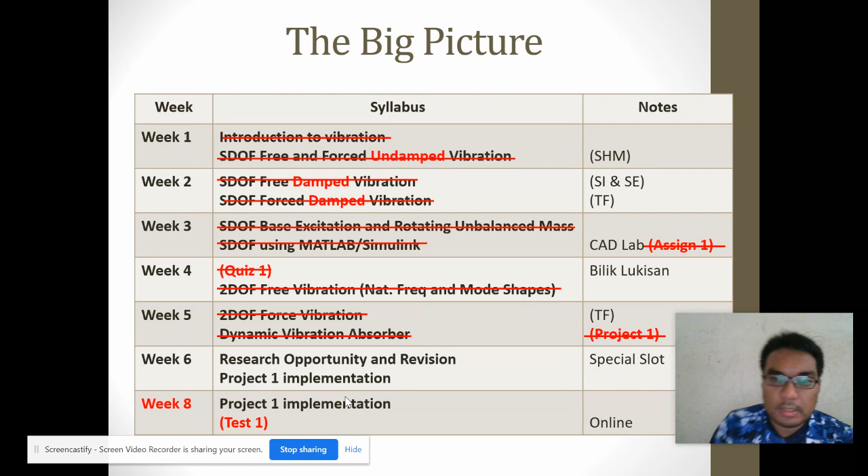For today we will review a little on what we learned before, and some of the main topics of my research. Topic number 1 is on active vibration control and active force control, on how you can control vibration instead of using passive methods like the dynamic vibration absorber. This is a more advanced method where we use real-time control of vibrations.

That also works in various operating conditions. The second topic is on piezoelectric material, one of the smart materials that can be used as sensor and actuator for any vibration system. The third is on noise and vibration characterization of the HVAC system, the air conditioner system.

Topic number 4 is on dam vibration analysis, in terms of flow-induced vibration from the fluid, when there is turbulence and how it can affect the vibration of the structure.

Topic number 5 is more towards what you learned before on the dynamic vibration absorber, one method of structural dynamic modification, SDM. Basically we have 4 methods where we can modify the mass, stiffness and damping, and also apply the DVA directly.

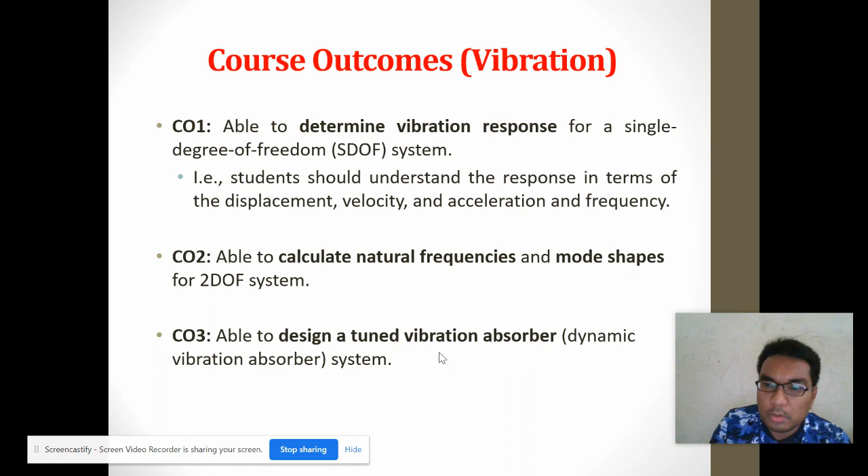Just to refresh also on the course evaluation: the final exam as of now remains 60%. Coursework is 40%, with 20% for my parts and 20% from Dr. Ui on the noise part. There's some modification on the percentage calculation for my parts. The test one that will be conducted later online is 6%, and the quiz one you have done is 6%.

This part, numbers 1 and 2, is more on the individual parts. For the group part there is assignment 1, MATLAB and Simulink, worth 4%, and also the project for the DVA is also 4%. So it's a total of 12% from the individual part, and another 8% from the group part.

So this is the overall revision. The first topic we learned is on single degree of freedom free undamped vibration, where there is only mass, stiffness, and the response, or the degree of freedom. You have to have these three elements for free undamped vibration.

The damping is equal to 0, no damping elements, so the vibration remains as is. It is not reduced in time because there is no damping, and there is no excitation force, so there is no transient period here.

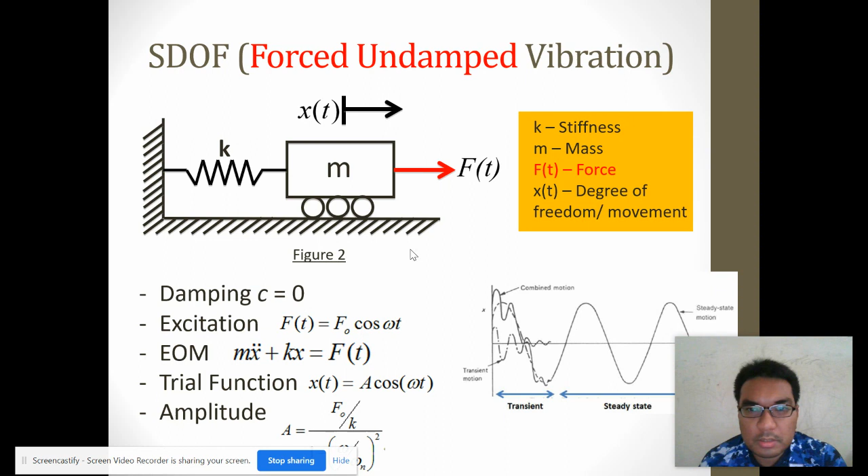So the second topic is on forced undamped vibration. There's just an additional force here, highlighted in red. For this case, c equals 0, so there's no damping.

There's no damping, but there's an excitation force, the external force f(t) equal to f naught cosine(omega t). The f naught is the amplitude, the initial amplitude of the force. This is the equation of motion, m x double dot plus k x equal to f(t), where there's an excitation force. The trial function must follow the excitation, so when the excitation force is given by cosine, the trial function must also follow cosine, so that we can cancel out later.

If it's given by sine, it must follow by sine. So this is the amplitude of the vibration that we can calculate, after we derive the equation and get the amplitude here.

This is the effect of the force, where there's a transient period, the transient motion. Then when it's combined with the steady state motion, it becomes a combined motion like this, with just a short period of transient before it becomes steady state. This is a very important part of any system that has an excitation force.

During this period, when an excitation is induced at the natural frequency of the system, the system becomes resonant. So make sure you design your system to avoid the natural frequency of the system itself, unless you want it to become resonant and your system to be disrupted.

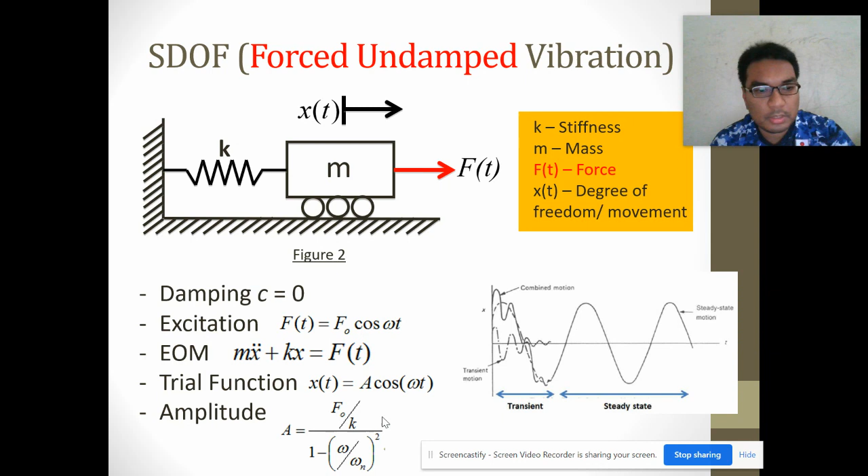From this, you can plot a graph, if you still remember there are three conditions of the excitation, shown in terms of amplitude and frequency ratio. This is the resonant part, where omega is divided by omega n.

Below, there are basically three conditions: omega near 0, omega equal to omega n, and omega being infinite, too high. You can refer to these equations, the formula, where when omega is too small, the denominator becomes 1 and there's a steady static deflection, this is f naught over k.

Then when the excitation increases and becomes equal to omega n, the denominator becomes 0, so when you divide, it becomes infinite. This is the area of resonance, there's no peak plotted here because it's a resonant phenomenon.

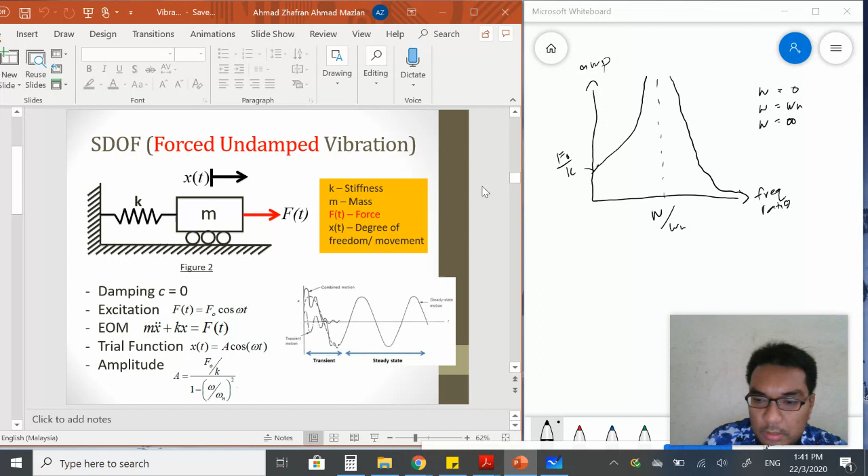So this one is for free damped vibration, when a damping element is introduced to the system. There's a free damped vibration, no force, but there's damping here. So for this, the damping is not equal to 0, it has a value, and the excitation equals 0.

There is no external excitation force. The equation of motion will be m x double dot plus c x dot plus k x equal to 0. So you have the trial function x(t) equal to A e to the power lambda t, where you want to determine lambda so that you can determine three different damping ratios.

So there's an additional equation formula that we introduce, the damping ratio, which is the percentage of damping in each system relative to the natural frequency. It's equal to c, the damping coefficient, divided by 2 times m times omega n, where omega n is the natural frequency.

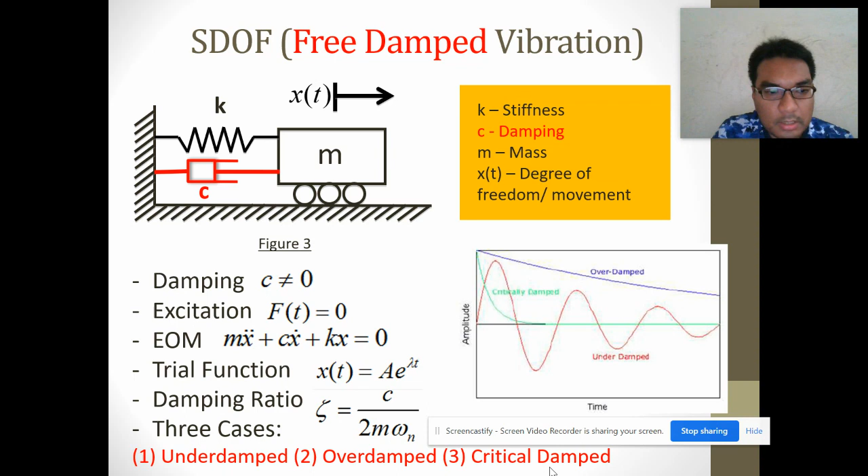So for this case, you will determine three conditions: underdamped, overdamped, and critically damped. For this one, you have a system like this, shown in terms of time and amplitude.

So you have a system which is underdamped, where this one is damping ratio less than 1. Damping ratio below 1 is underdamped. For the overdamped, the second system, you have a response like this, where the damping ratio is over 1. It's too large, this is too small, and there will be the case of critically damped.

We as engineers always want to design a system like a suspension system to have a damping ratio equal to 1. That's the most efficient design of the damping system.

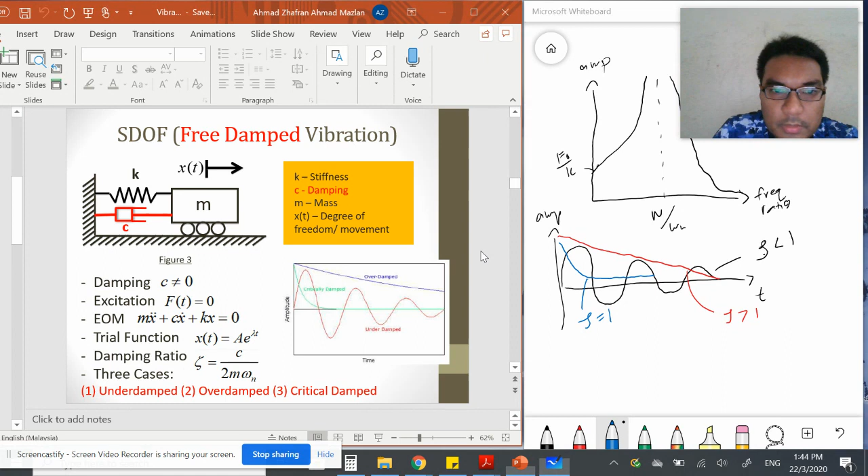Another topic here is the forced damped vibration. For this one, there's a total of 1, 2, 3, 4, 5 elements here: stiffness, damping, excitation force, the mass, and also the response. For this case, the damping is not equal to 0; it's a damping element. The excitation force is F0 cos omega t.

The equation of motion is the complete one, m x double dot plus c x dot plus k x equal to F(t). The trial function x(t) equals A cos(omega t minus phase theta). And this is the amplitude that you get, and also the phase angle formula.

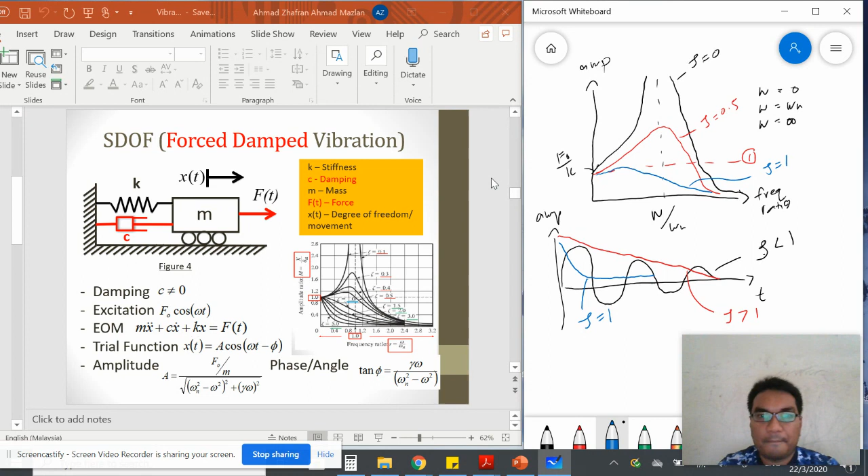The next part will be two examples of applications of the single degree of freedom. The first application is the rotating unbalanced mass, where you have the excitation force in terms of the unbalanced mass here.

The system has stiffness and damping, and the total mass big M, which includes the mass of the system and also the small mass m of the rotating mass. The eccentricity e is the radius from the center to the unbalanced mass. The angular speed omega is the rotating speed if you have a machine or motor in your system rotating, for example, at 200 hertz. And theta is equal to omega t.

For this case the equation of motion is almost equal to the damped forced vibration: big M x double dot plus c x dot plus k x equal to small m, the rotating unbalanced mass, times e omega squared sin omega t. Basically this is F equal to ma, where the acceleration is e multiplied by omega squared. The trial function is x(t) equal to A sin(omega t minus phi), and this should be your final equation.

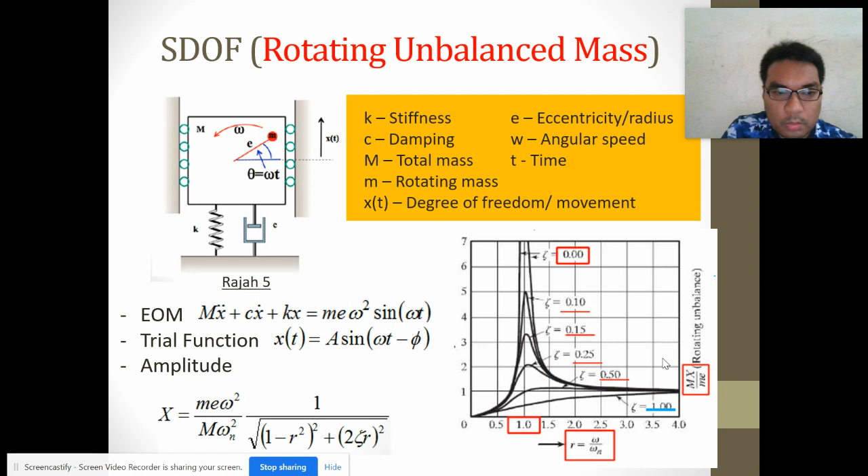This plot is quite different compared to the general one, where we start from the static deflection value of 1. This one starts with a value of 0 because there's the excitation omega in the numerator. So when omega is equal to 0, the overall amplitude becomes 0. Of course, as omega approaches omega n, when the frequency ratio r equals 1, it goes to resonance, similar to this.

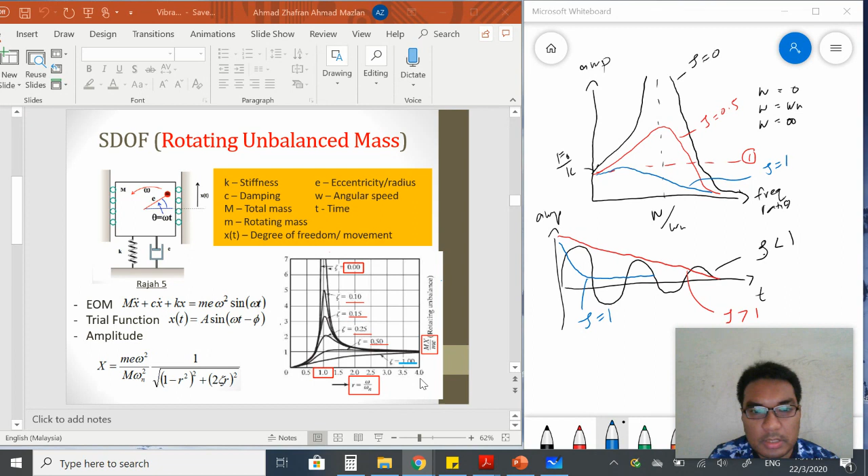That's why the rotating unbalanced mass must have damping. If there is no damping, it becomes worse, as we have shown you in the case of the helicopter and the washing machine. It can disrupt the structure, and by increasing the damping ratio, it becomes more stable in terms of vibration. The final value tends toward 1 as you increase the excitation frequency, so the amplitude almost becomes 1.

So our next system is on the base excitation. Okay, so the source is from the base. It's a moving base, it's not a fixed base like before. For example, this is a fixed base here, and this is also a fixed base here, but for this case it's a moving base.

Okay, so for this case we have stiffness, damping as usual, a mass, and also the response, and we have an additional y(t) here, or it can be x1 or x2. So the base has an excitation in terms of displacement and velocity. It's not in terms of force but in terms of velocity or displacement.

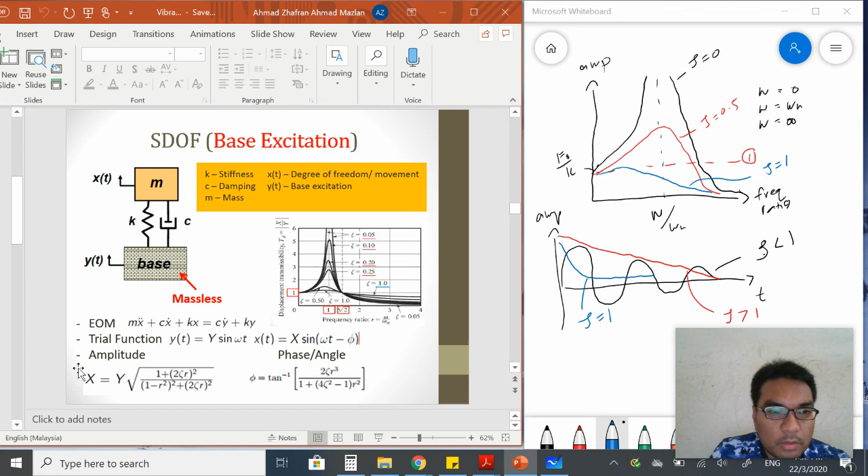So this is the equation of motion. After derivation you can get this one: m x double dot plus c x dot plus k x equals c y dot plus k y. So this will be the excitation to the system. For the trial function we also have one for the x response and one for the excitation y. So from this we can get the transmissibility.

Because here when you divide X over Y, output divided by input, you get this formula. And then when you plot from omega equal to 0, omega equal to 1, until omega at a large value, you get this plot, which is similar to the previous one for forced damped vibrations, starting from the static deflection here, going towards the resonance, and then going back down to 0 when the excitation frequency is high.

So this case is very special. For whatever value of damping ratio you have, when the frequency ratio omega divided by omega n equals square root of 2, all the curves cross at an amplitude of 1 here. So you still remember there are six rules of this graph, which may be asked later, and you have to know from this part what the six rules are.

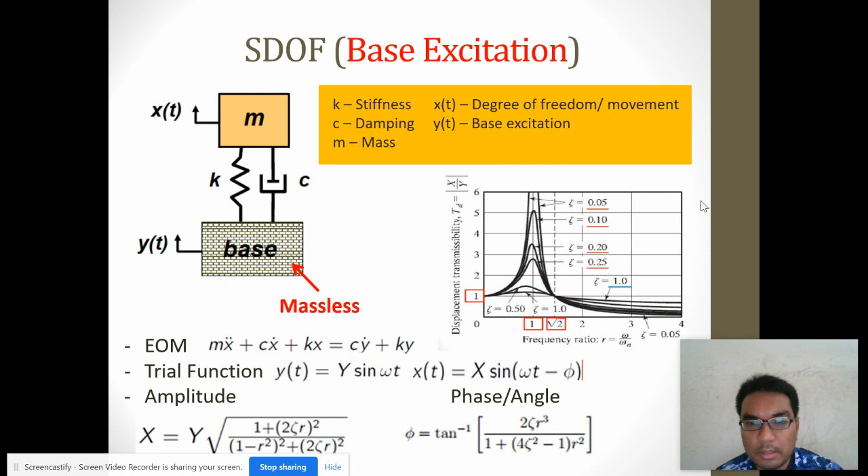Okay, comes to our next system: the 2 degree of freedom system, where there's an additional mass and spring system, and also the response. This one is under free undamped vibration; there's no damping element here. You have mass number 1, stiffness number 1, and response number 1, and also mass number 2, stiffness number 2, and response number 2.

So when it comes to a 2 degree of freedom system, you must have 2 equations of motion. When it comes to 3 degrees of freedom, you must have 3. If you get 2 degrees of freedom but just 1 equation of motion, that should be wrong; you must have 2. So the trial function is x(t) equal to X e to the i omega t. This is the trial function, the response of the system.

So you should follow these 4 steps. Step number 1, you must derive the equation of motion from the free body diagram, in matrix form, and later you replace the acceleration and displacement using this trial function. After replacing it, you get a roots equation, and if the values of mass and stiffness are given, you can find the natural frequencies omega 1 and omega 2.

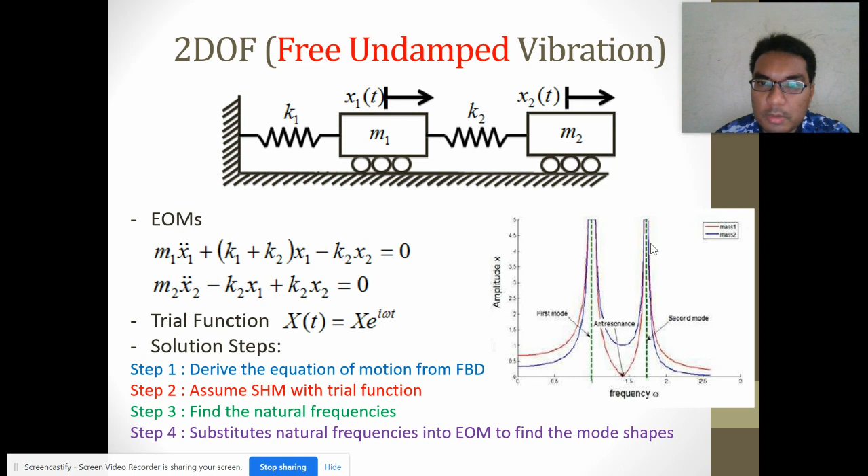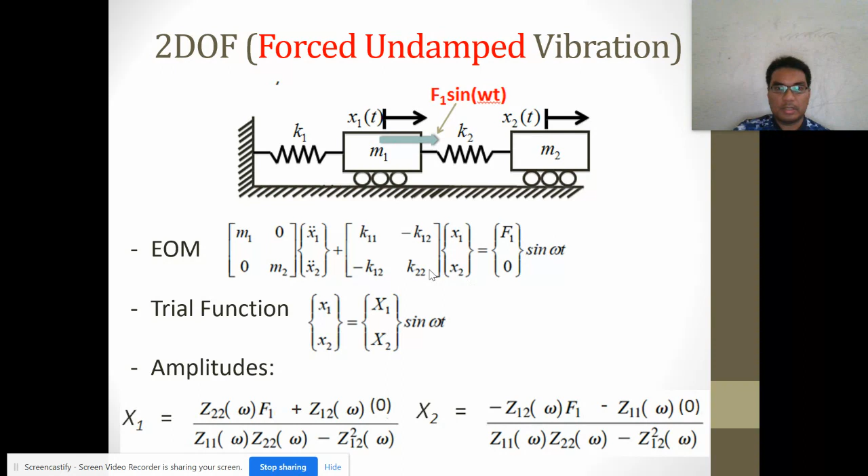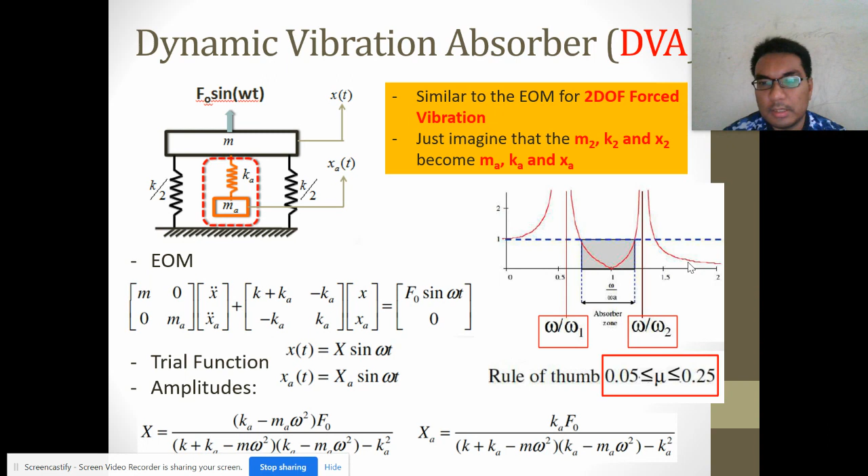So the rule of thumb to design your mass MA for the system: the mass ratio must be between 0.05 and 0.25. That's the thing you must be alert to for the system.

Next, I want to introduce the research opportunities for you. When you come to your final year and you want to decide what type of research to do, if you're interested in vibration, there are some listed topics I can offer to you. Maybe I can also show you some results from previous studies that might interest you. Just to show you some history of the students who took my final year projects, and also some of the postgraduates.

So your seniors have now done 2 topics. Jah did active vibration control for the piezo, and another person, Chiu, is doing intelligent control methods. He will also participate in Innovate Malaysia 2020, so we wish him good luck and all the best for the competition.

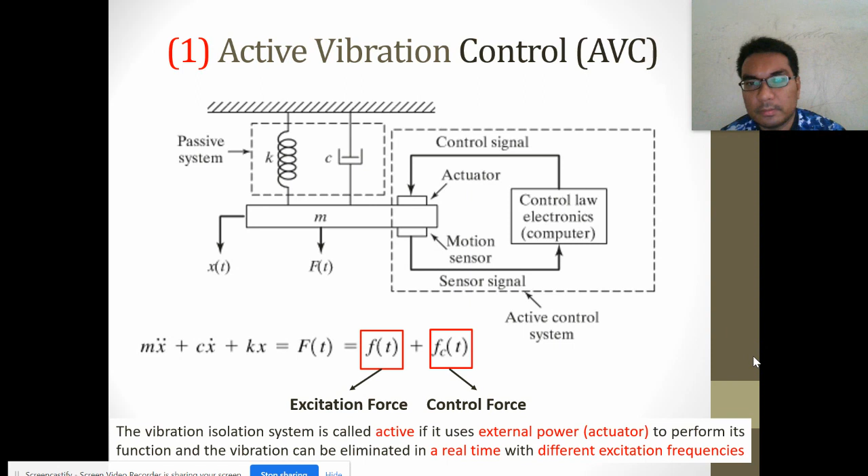The hand-arm model we can take from any literature on biodynamic hand-arm models; various studies have been done. We can pick any model we are interested in, and later insert the actuator in between, so we can develop a full model of active vibration control. For the system, you can see the difference between PD, the proportional and derivative controller, and the AFC, the active force controller, with a crude approximation tuning method, that we compare.

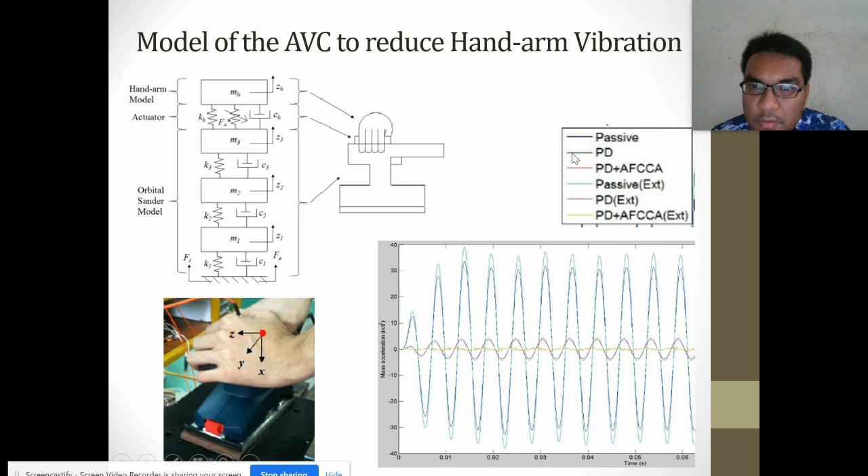You can see the blue one is the passive system. With the PD controller, it reduces here, and when you introduce active force control, it further reduces the vibration to almost zero. EXT refers to when we introduce another external disturbance, and how the system reacts. For the passive, when another disturbance is suddenly introduced after the tuning is complete, you can see the effect here. But for AFC, it still remains, the yellow and orange in a similar line. That's a very powerful controller for the system.

Okay, so you can also measure the force induced from the actuator. Okay, this is a piezoelectric actuator. It's a smart material. Okay, and then you can reduce the vibration, of course. Okay, and when we think about this,

the weakness of the piezoelectric is it must have a preload. Okay, you cannot just put it on the table and operate it. It cannot be done like that because it has a ceramic material there. It may break the molecules inside the actuator, and then the actuator may not function well. So we must have a preload like this in terms of a spring. Okay, so they will always account for the vibration.

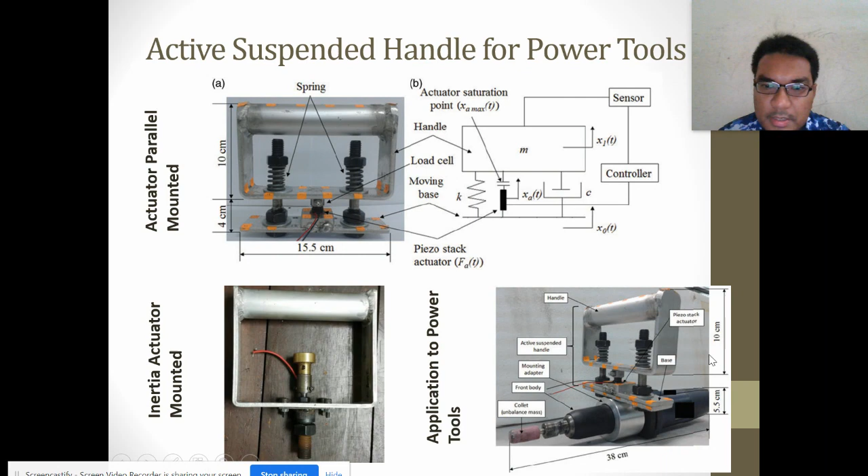Okay, because from this, when you want to apply it to a real application of a power tool like this die grinder, it's quite difficult because you have to disassemble everything and assemble it back exactly as you have here. But from this, you don't need to disassemble the system because it's already one set. You just need to modify the lower part to apply it to these power tools.

Okay, the second topic is on the piezoelectric sensor actuator. Okay, as I explained before, piezoelectric is a smart material. Okay, why do you call it a smart material? Because it can react both as a sensor and actuator. Okay, so when mechanical stress or movement is given to these materials, it can generate electricity, and from the electrical signal, we can take it as a sensor. And vice versa, when electrical excitation is given here, it will move mechanically and it can become an actuator.

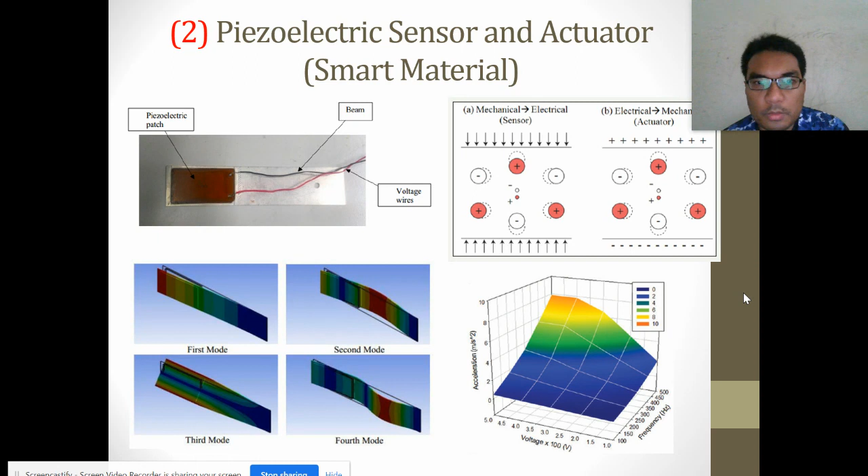Sorry, maybe I can wait.

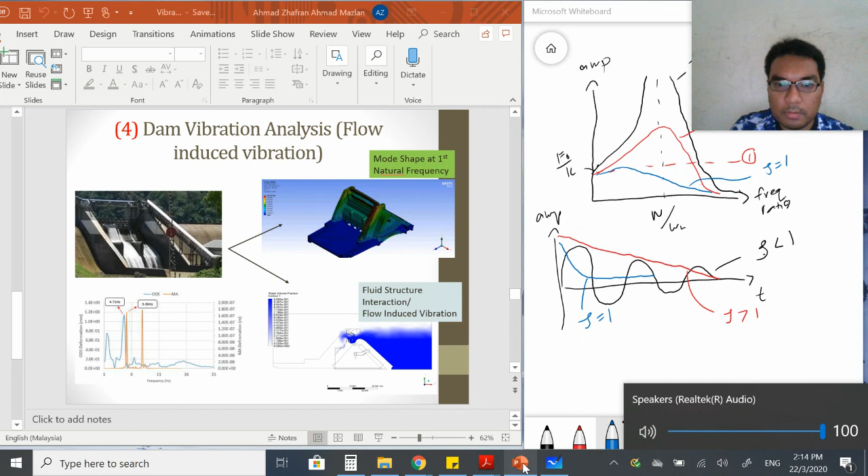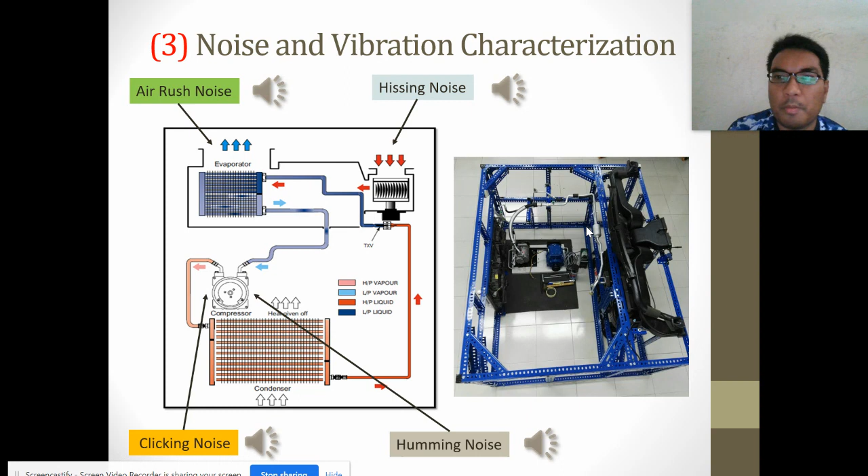Okay, so basically in a car engine system it cannot be heard physically, but if you put a sensor on it, it can be measured. Actually it's a combination of all these noises that creates the annoying noise in your car cabin. Okay, basically you don't know the root cause of the noise. It's just a combination of noises that becomes another noise.

So this is another study on vibration analysis, from flow-induced vibration. Okay, this is the example of the dam spillway. And this is the water that spills. Okay, so basically when you have a drawing of this dam, you can draw a detailed drawing exactly like this.

You can also find, not just for a simple beam but for complicated designs, the natural frequency of the structures. You can see the first mode and how the modes move, as well as the exact value of the natural frequency of the dam. Why is this important? Because when the dam operates and there's fluid-structure interaction from upstream to downstream flow, it may induce a vibration similar to this mode shape.

So when it induces the same value as this natural frequency, it will induce resonance. This is an example of a graph where the modal analysis shape natural frequency and the operational displacement shape from flow-induced vibration are quite close. If we don't notice this, in the worst case it can become resonance. That's the importance of this study.